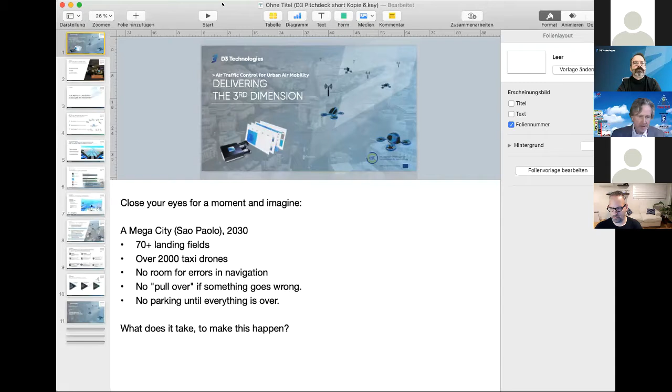Hello Willy, thanks for letting me be here. Can you hear me? Yes, I was muted already. Yes, hear you perfect, fine. Is it okay to share a screen? Yes, that's what we expect. Can you see full screen now, Willy? Yes, perfect, excellent, affirmative, thank you very much.

Hello to everyone listening. I'm very pleased to present our startup company. We've been around for about 9 to 12 months now, a little more with preparation time. So we're a newcomer to the field, but you will find out in a few moments that we believe we can bring a lot to this grand new venture of aviating urban skies.

Close your eyes for a moment and imagine a mega city in 2030: 70 plus landing fields, over 2,000 taxi drones in the air, no room for errors in navigation, no pulling over if something goes wrong, no parking until everything is over. What does it take to make this kind of traffic happen?

Urban airspace is dense, complex, and totally unforgiving. The well-known human pilot controller interaction is not a scalable proposition. No comprehensive solution has been proposed to this point, although a lot of ideas are being circulated. Air traffic control needs to be rethought from the ground up.

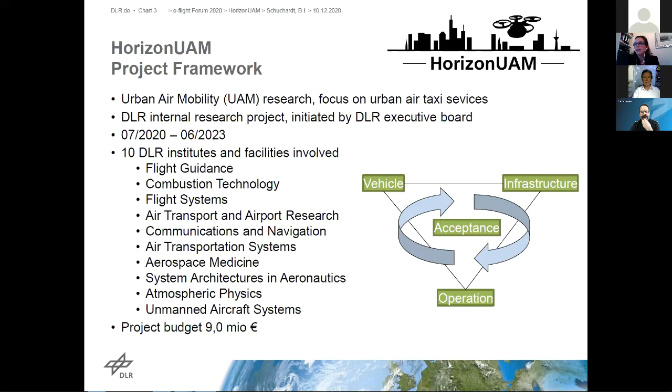Okay, this is the outline of the project content. I already said we are looking into vehicles - we won't actually build a vehicle, so we will keep it to theoretical layout of vehicle family concepts, looking into system technology and cabin design.

We will have the vertidromes - the infrastructure, flight guidance, network management and airport integration. As I said, acceptance is important, and we will also have a UAM system simulation, which we already started. We will have an overall system where we integrate the ideas of the 10 institutes involved in this research and bring together our simulation models to forecast demand, the economic effects, and to see how the UAM system can be operable.

Very important is the aspect of safety and security, especially autonomy. In the first designs and first vehicles we will probably still have pilots, but if we want a high number of operations and a future mobility system, we are envisioning a high level of autonomy, up to full autonomy without any pilot involved. So it's important to research this autonomy topic and how autonomy can be a certifiable process to be safely integrated. The last point is demonstration and assessment.

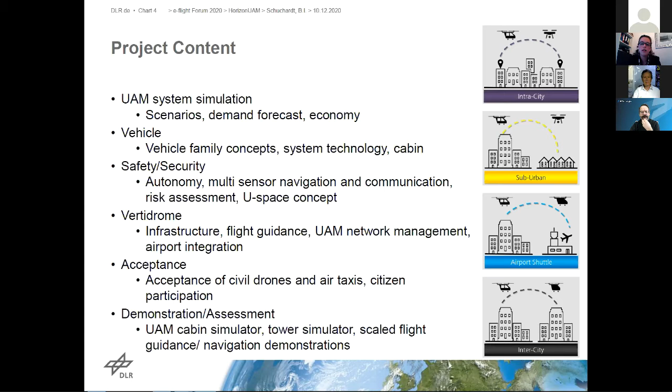We're happy that DLR recently bought a small regional airport in Germany, and we are planning to convert this into a test site for drones and urban air mobility vehicles in the next years. We will also have scaled flight tests here, not with real UAM prototypes yet, but with smaller drones to demonstrate our flight guidance and navigation concepts.

I've brought two more slides with topics I want to briefly focus on. First is the UAM aerodrome, the vertidrome, which we are looking into in detail in our research. I cannot present all of it, but take this as an example of what we are doing.

With the vertidrome, the difficult thing is that we don't really know yet what a vertiport or vertidrome will look like. We know conventional aerodromes, but not yet what a vertidrome needs to look like for high density operations in the inner city area.

So the first thing is that we need to forecast the demand. How many vehicles will be flying? Where will they be flying? Where are the best locations for our UAM aerodromes? Where do we have to place them in the city or around the city?

Then it's important to know what kind of vehicles will be landing there. Is it all vertical takeoff and landing, or do they need some short runway? This will have a big influence on how to design the vertidrome.

When we look at the operation itself, here comes in the flight guidance part of our research: what is the layout of the perfect vertidrome, scheduling, sequencing, how to manage the approach and departure paths, the trajectory planning. This is something we will look into.

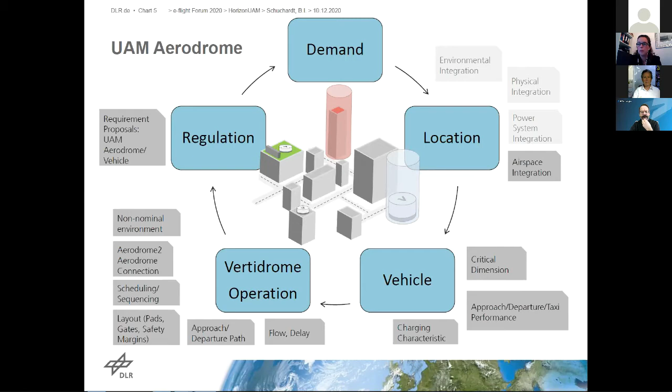And then in the end, we have to come up with new regulations. We have European regulations for helicopter operations, for example, but we do not have ready regulations for UAM operations. This is in the process of being developed, and we hope our research can bring ideas into this regulation initiative. If you can go to the next slide, please.

That's the second part. The session is called UTM, which is the term more common in the US. In Europe, the term U-Space has been created - that's the vision of the European Union to have a set of services designed to support safe, efficient, and secure access to airspace for large numbers of drones.

The initial idea was to have drones, but if we have a highly autonomous, up to fully autonomous, urban air mobility vehicle, we can see it as a drone. This U-Space concept and its services are supposed to provide the enabling framework to support routine UAM operations as well as drone operations, and to provide interfaces to manned aviation.

What's important to say is, although it's called U-Space, we do not see it as a defined volume of airspace. In the beginning we will need some segregated airspace for the first trials, but the goal in the end is to have no limited airspace for certain types of users - a fully integrated airspace for all kinds of users.

The U-Space concept foresees developing the services we need in four steps. We are currently at the first step, U1, with foundational services that are easy to start with, like e-registration of drones, e-identification of drones, and geofencing. That is the starting point.

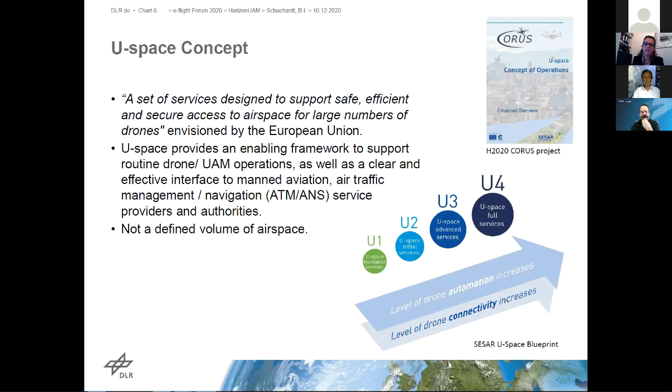Sorry. Yeah, there it is. Yeah, that's what I wanted, exactly.

Let me quickly tell you about the project phases. I said it was a 3-year project, so we are now in year 1, still working on the theoretical basis and gathering knowledge together. Year 2 will be more into implementation, getting our simulators ready and preparing demonstrations, and then phase 3, up to the year 2023, we will have our drone demonstrations and simulators ready for the final assessment.

I wanted to let you know that we are planning yearly symposia for scientific exchange beyond the project boundaries. The first symposium was planned for September 2021. So if you're interested in seeing first results from our HorizonUAM project, feel free to contact me. I'll keep you updated on the form the symposium will take and how we will share our research results.

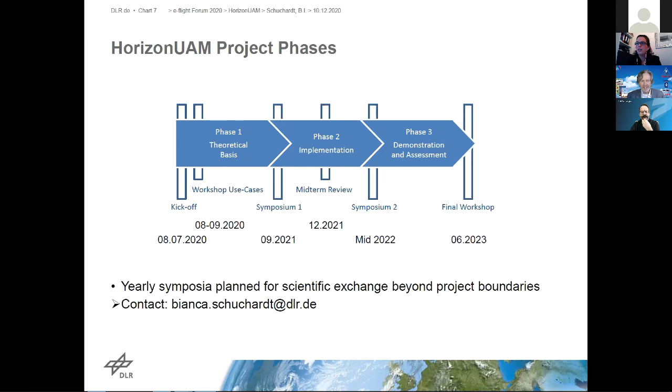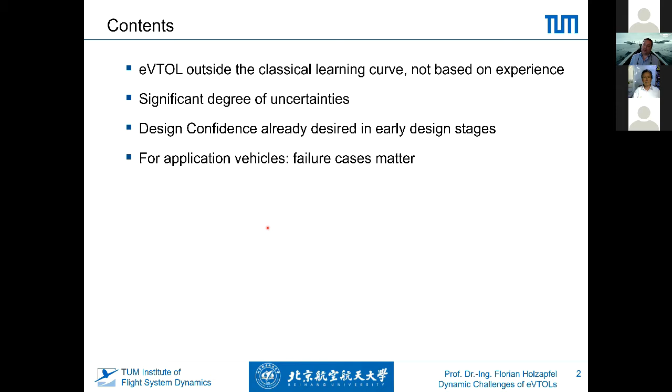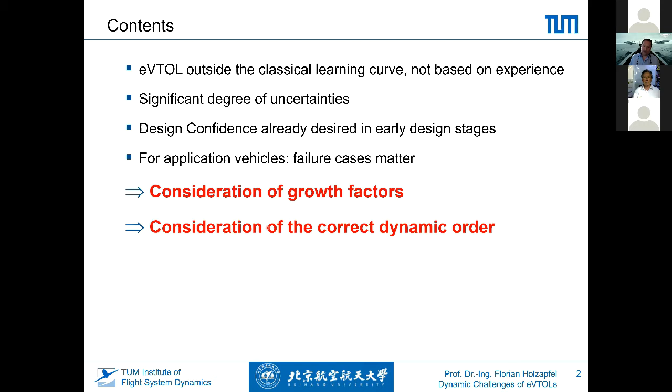The background is that eVTOLs are quite new, so there's not too much classical learning curve yet, not too much experience, but we still have a significant degree of uncertainties. Very much in the beginning, we already want to have a very high design confidence when we build a new vehicle. It's not only important to account for the nominal dynamics, but especially if you want to make a product vehicle, also for the different failure cases. We must carry over what we learned from small vehicles to big ones, but we need to take care of growth considerations. For large vehicles, we have to account for the correct dynamic order. We actively have to manage uncertainties in our models. We need to consider dirt effects that may make life hard, and as already addressed, we also need to consider failures.

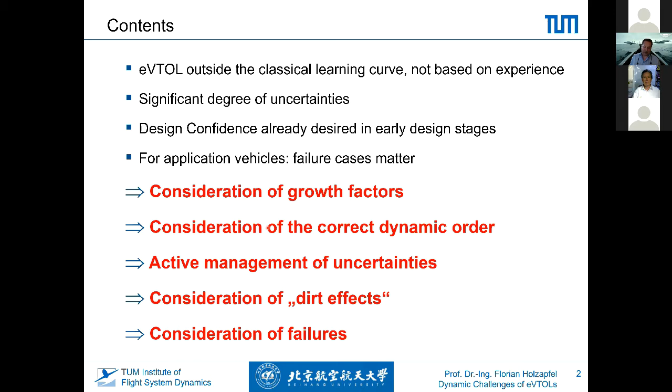This is a slide I already showed last year about the scaling factors. Many people build subscale models and then think you can directly carry over the experience gained to larger systems. What I'd like to highlight is that if you compare, for example, a 25 kilogram vehicle and a 600 kilogram vehicle, many properties, like the propeller inertias and so on, do not scale linearly at all, meaning important numbers get very nonlinear scalings. For example, if you want to make a sidestep maneuver of 5 meters in 5 seconds, for the 25 kilogram vehicle you only need 2% additional current, whereas for the 600 kilogram vehicle, the increase in current is 50%. So I'll try to speed up.

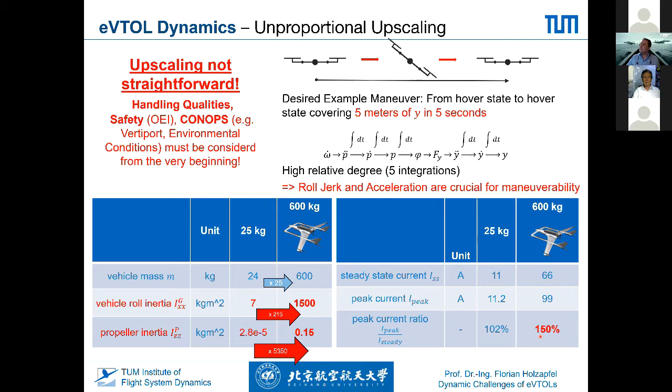This is a short summary: things don't scale linearly, be careful. The next thing is you have a lot of new effects which you don't know from classical airplanes.

For example, this time in hover, you have a lot of propeller airframe interactions.

Then what is very important in transition is the propeller aeroelasticity, because it leads to very large alternating moments from the structural loading, which are acting in the hub of the propeller.

Then depending on the configuration, and I'm happy that I saw some faces today from other companies from which I knew that they're also addressing these effects.

As soon as you have overlaps in the propeller areas, for example, you immediately get significant thrust losses, which is something you have to consider right from the beginning.

Then here on the upper right side, there's transient effects, which if you look from their scale in the time are very relevant to be considered also when you look at the rigid body dynamics.

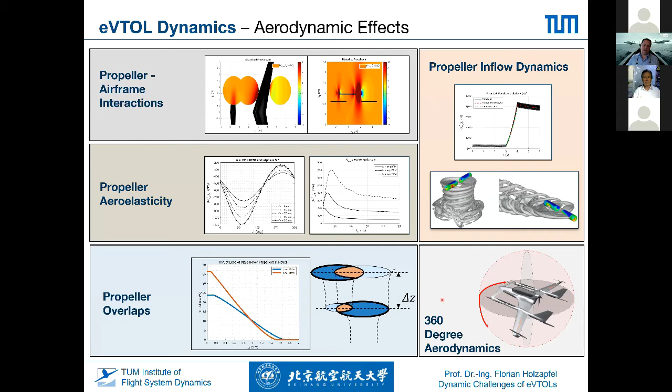And then finally, of course, in hover, you need 360-degree aerodynamics because you can have lateral gusts and things like that in hover. And so also for your fixed wing rigid body aircraft part, you need to account for aerodynamics which you normally would never calculate for normal fixed wing airplanes.

Then the next thing is that, of course, the structure is elastic, and now with the lift systems, especially under failure conditions where you have to redistribute, you have quite some excitation of structural responses, which lead to time lags in the rigid body response.

That also leads to aeroservoelastic effects. And this is why basically for the larger vehicles, these aeroservoelastic responses need to be considered right from the beginning.

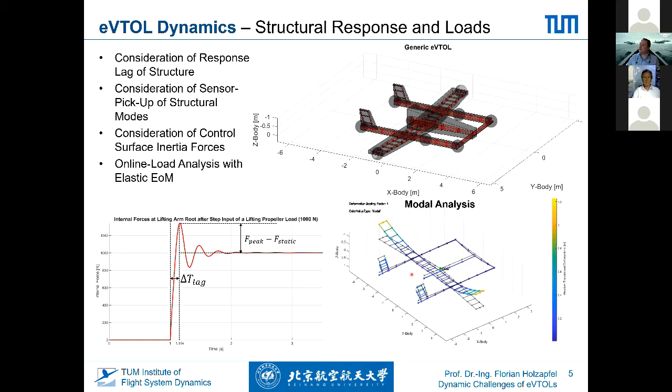So far, you saw things which are mainly based only on simulation. Here on the next slide, you would see measurements from the transition of a real 280 kilogram eVTOL. So that's the whole flight: hover, transition, fixed wing flight, retransition and landing.

And so you see you have a large contamination with vibrations. And so one of the important things is if you want to optimize your frequency domain response for the controller.

Is that you have appropriate methods to not only identify your vibration spectra, but also to produce models which in time domain simulations can make a very good replication of your vibration spectra so you can account for them during controller design.

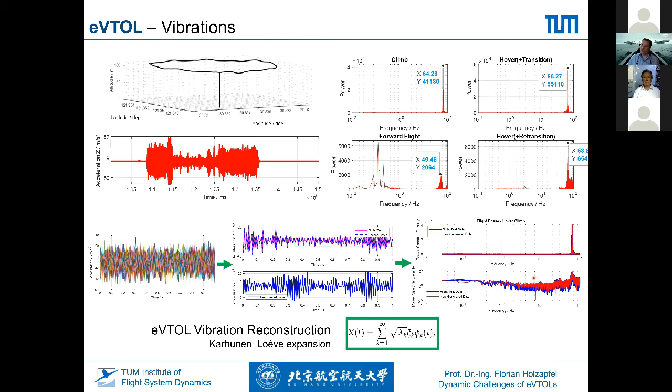Then the next thing which I introduced already in the beginning is that there's a very high level of uncertainties in the data because of the lack of experience, and therefore we moved away from having nominal models.

But for every model we make uncertainty modeling where we in the end use the stochastic characteristics of the uncertainties by specifying distributions and the values of these distributions, like normally distributed and so on.

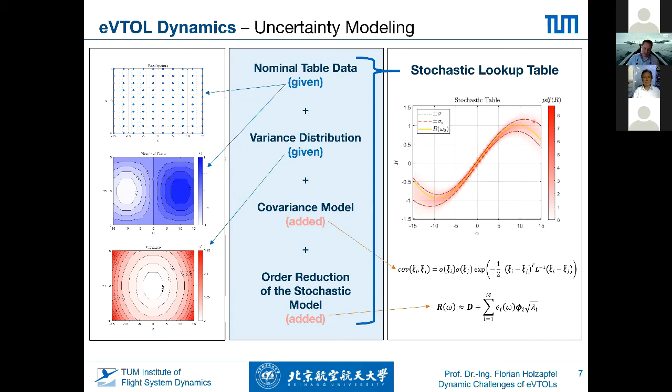And so one of our researchers implemented, in my opinion, a very cool new way in order to quantify these uncertainties in simulation models, which then can be used in analysis for making probabilistic predictions.

So for example, when you want to have the envelope which with a 99% or an 80% probability is trimmable and so on, you can now make all these flight mechanics and performance computations in a probabilistic manner.

Which helps you to set good design targets, for example, for maiden flight envelopes and so on. Then very important is what happens if you have failures.

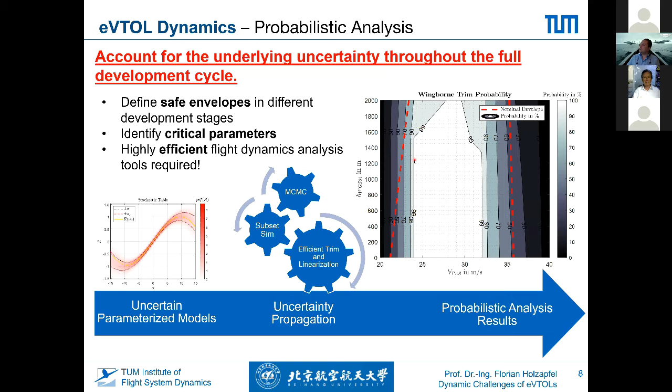Here I want to acknowledge our partner Beihang University, Professor Chang and Ming-Kai Wang, who are helping us very much in our very close cooperation.

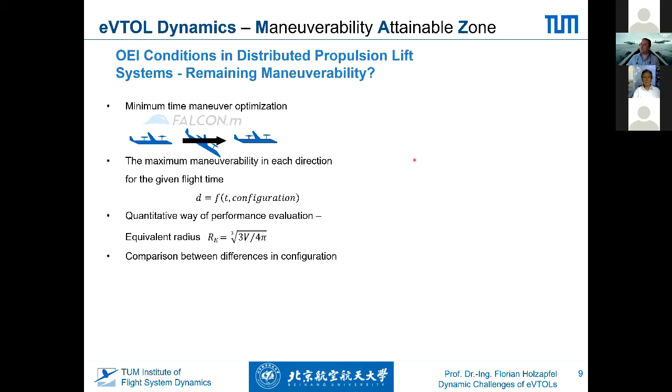And what you see here, again, I speed up, is basically the maneuverability envelope which you would have within 3 seconds. This is the red area if no engine fails. And so the volume you see inside is the guaranteed remaining maneuvering envelope if any single engine of a certain eVTOL configuration would fail.

And so this is very important to know because especially the precision in hover, which you have in a failed condition, is very important.

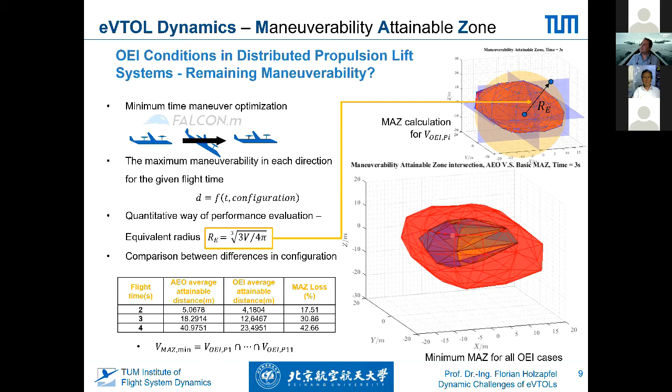And just like this, we also look at the handling qualities, where for the hover case, for the time being, we take a classic rotorcraft handling qualities approach and we look which handling qualities requirements are still satisfied if we have, for example, one engine inoperative.

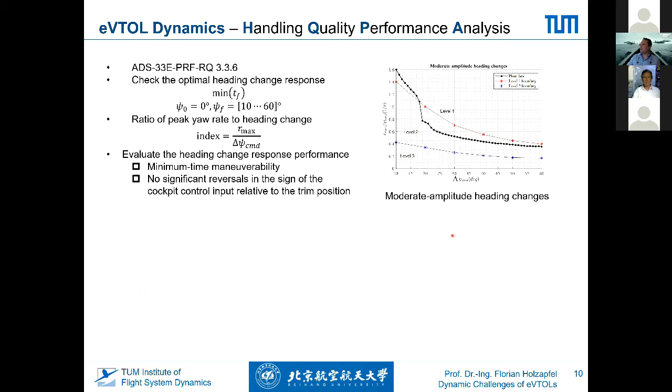And so here, for example, you can see the hover heading precision handling quality requirement, or the same thing, for example, for the altitude response.

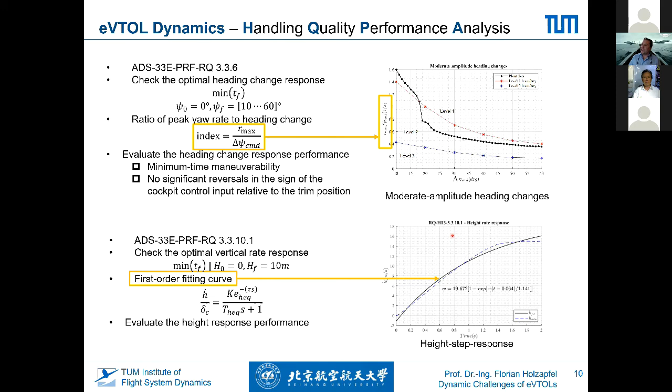And once again, it's not about the nominal behavior, but it's especially about the behavior in failure cases. And to do piloted evaluations for these handling qualities, we mainly use mission task elements.

And we are very happy to see that in ASTM F44.50, the task group WK68767, which is considering simplified vehicle operation, and also NASA and FAA, by the way, are also focusing on mission task elements as a very suitable way of doing the evaluation.

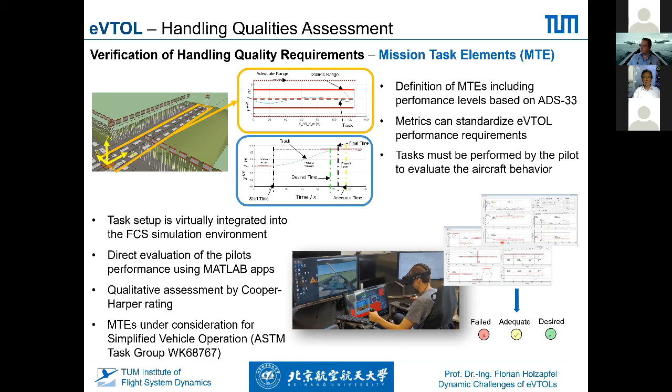Most of the time we use a virtual reality setup, so the pilot can look around and move the head, and basically we do a quite automated evaluation for this. And then finally, if you do flight tests, you want to do parameter estimation to update your simulation models from flight test. And this is what we're doing.

I think one of the new things we have there is that basically the identification routine is directly coupled with a blade element theory, a bottom-up physical model of the airplane. On the top right side, you see the identification results of one of my researchers for a Flettner rotor helicopter.

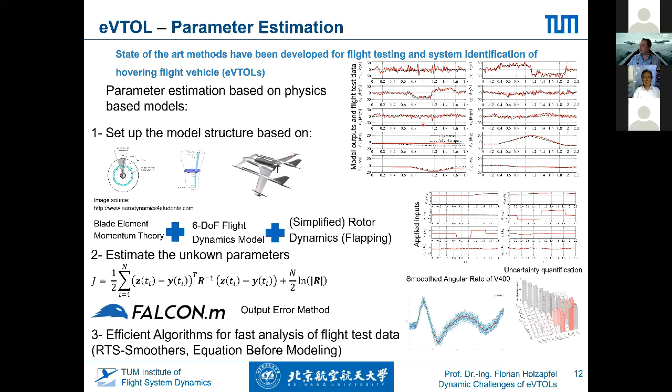And just to highlight that this is also working very well in the eVTOL domain, you can see here from a flight test for a 400 kilogram transition vehicle, from a real flight test just last week, basically the raw measurements, which would be the blue dots, and the data you get with a smoother, which is really based on a model of the system. This would allow you to get a very smooth reconstruction of the angular accelerations, which is then the input step to identifying the physical parameters of the system.

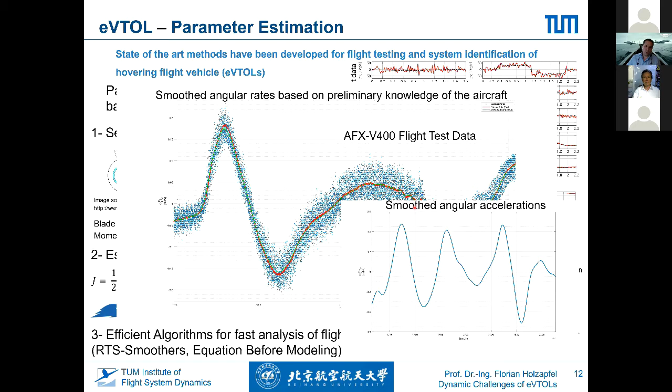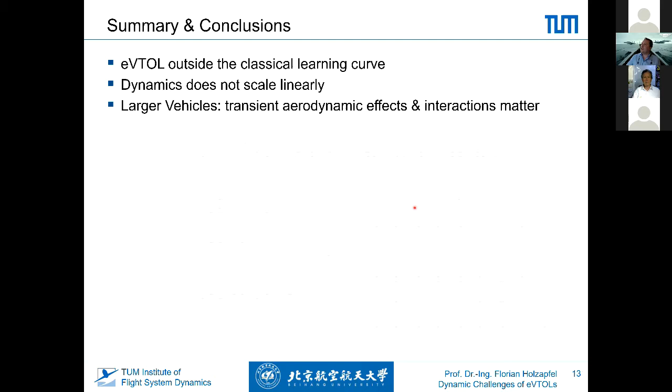So to sum up, eVTOLs are outside the classical learning curve. The dynamics does not scale linearly with size, so you have to be aware of size factors. In larger vehicles, transient aerodynamics and interaction effects matter more than in small ones. The structural dynamics adds a lag and low damping to critical responses, this is why you have to account for it. And it also produces new load cases with the lift systems in hover, especially during failure cases.

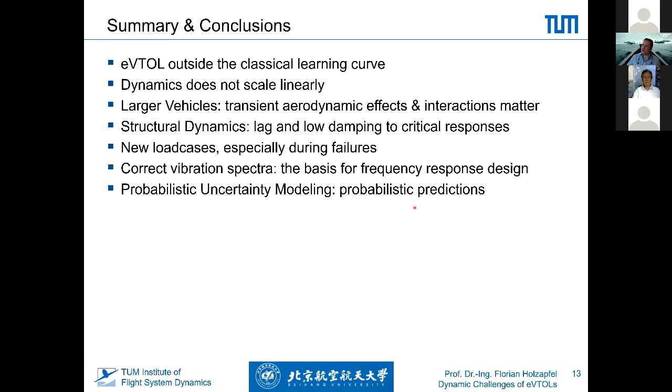You need to account for the vibration spectra of the real vehicle if you want to optimize the response of the closed loop system with the controller in the frequency domain. Then the probabilistic uncertainty modeling allows you to make probabilistic predictions with which probability a certain requirement will be fulfilled, to give you more safety in the background of the uncertainties.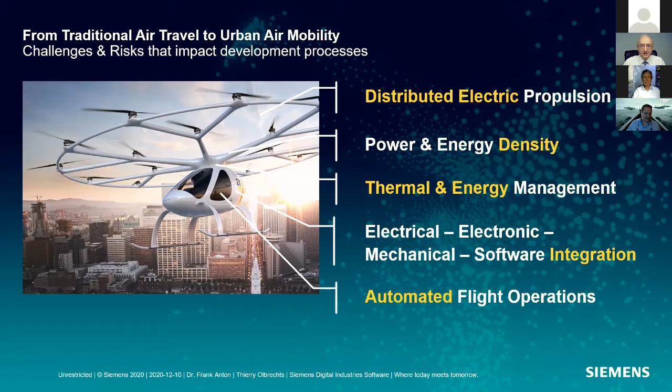But then it also comes to automated flight operation, which certainly, and I loved the word eVTOL that we learned about this morning. The automated flight operations, you will immediately ask for how can I early determine whether my sensors work, what do my sensors see, and can I simulate that, and can I understand how the system will be at the very beginning. But then it's also about the business model.

How do you deliver the whole logistics? When is which aircraft where, and where is it going to be charged, and how does the network work, and all these questions within the, let me call it, passenger experience. Also, this is something that with simulation, with the digital twin of the whole enterprise, you can very early design.

And then, you know, and you believe you are ready, you are close to ready, then it's of course about verification and certification. And there is this famous factor of pi. A project in aviation always takes a factor of pi more money and time than you anticipated. And if it is not an order of magnitude, but only a factor of pi, then you may be considered to be good. And verification and certification, if you have it in the process from the beginning in your design, in your digital twin, in your digital design, then you have a good chance of finalizing the project successfully.

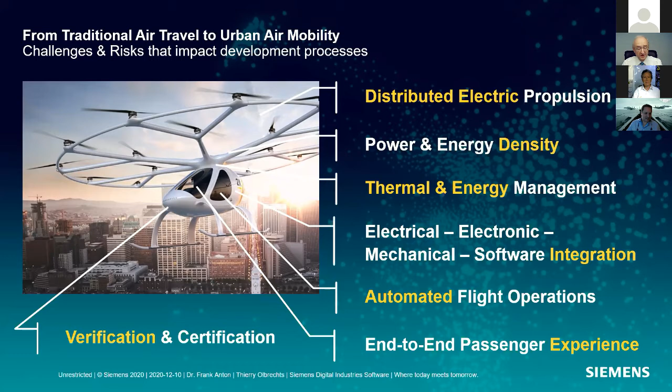And yeah, now I'm going to show you all the inside views and all the mysteries and simulations of these components. Oops, I forgot. I sold the business Siemens e-aircraft to Rolls-Royce a year ago. So obviously we also sold all the IP to Rolls-Royce. So unfortunately I can not.

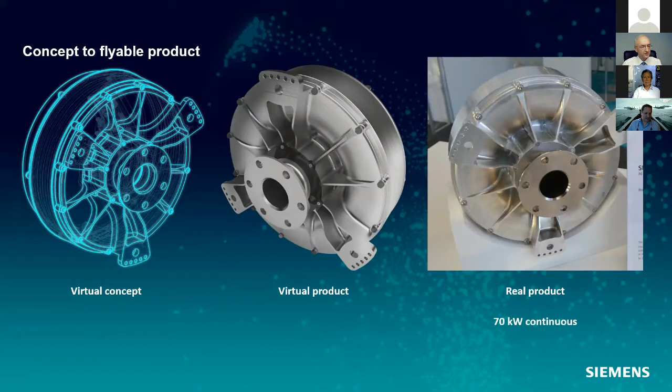So somehow I have to change the concept of my talk, and maybe I just speak about the experiences in application and tell you a little bit about the practical advantages that we had from simulation.

So again, to be such fast, we were using multi-physics simulations. Here are two examples. In the bottom line, you see the design of an electric machine, a motor, coming from electromagnetics, and the very important part of the thermal and cooling, but also the acoustics, leading to the integrated performance. And in the top line, it's the battery system coming from the cell design, the chemistry, the integration, the cooling, the control.

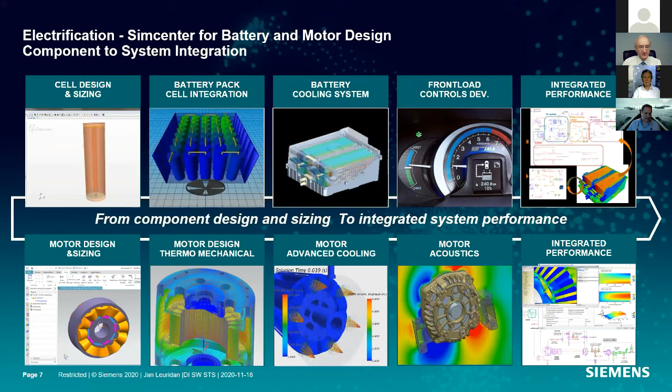And here you see a control system in the large area of automotive, where this software is widely applied. I, as a pilot, love the user interface of an aircraft much more than this one. And again, this leads to the integrated performance. Only with these multi-physics simulations, simulating everything at the same time, all the effects, were we able to really get fast to the early flights.

Just to take one other example, acoustics: there are so many factors which generate noise, and noise is probably the most important thing in electric vertical takeoff and landing. There's the structural noise, the noise coming from the fluid, but also from the fluid coupling with the structure. Then there is the turbulent flow, which by itself makes noise, but also makes noise by exciting vibration in the structure. And there is also noise generated by electromagnetic fluctuating forces in these electric machines. To simulate all these noise factors at the same time is of utmost importance when you look at the acoustics element of the flight.

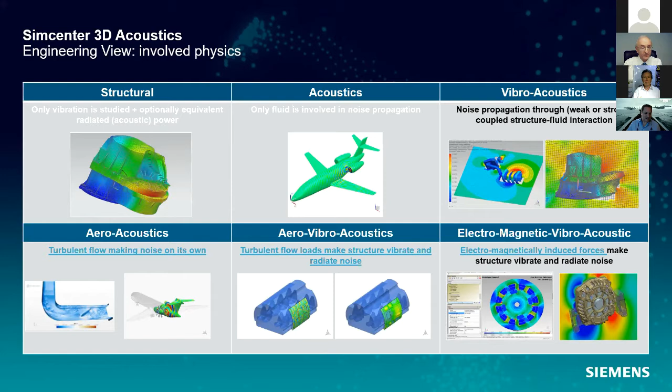So, a few examples of what we could only do by simulation. This is probably the smallest inverter that has ever driven an electric plane. It has a height of only 47 millimeters, much less than 2 inches, and with a weight of 0.9 kilogram and more than 100 kilovolt amps, it has 116 kilovolt amps per kilogram. Of course there were all these aspects of thermal, electromagnetic simulation. Only by simulating all this were we able to get very fast a permit to fly.

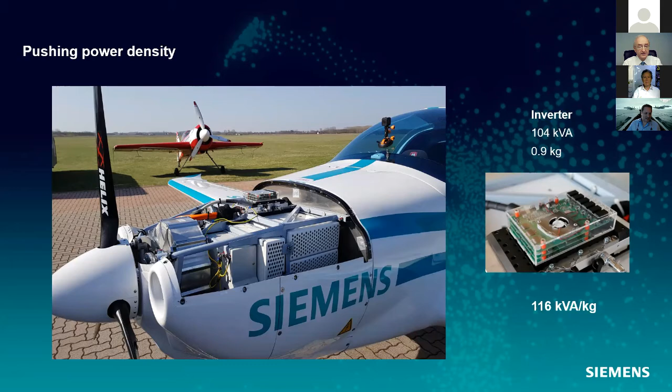On the left-hand side, you see that in one of the Magnuses we integrated this inverter, connecting it instead of the normal inverter, which is just one of the big boxes that you see here. And I actually flew one hour with this plane with this inverter. The only way to get there so quickly was by simulating with the digital twin beforehand.

Another game changer that was only possible by early simulation was, at that time, the strongest electric aircraft in the world with 260 kilowatts of continuous power. We integrated this into the Extra 330, which was called LE, for electrical, then. And it was very fast. With simulation, we were so fast that it only took us like 7 months. The handshake with Walter Extra I had in early December, and in July, just 7 months later, July 2016, Walter did the first flight of this strong electric plane.

A couple of months later, FAI world record time to climb, and 2 world records in speed, one for less than 1,000 kilogram, one for above 1,000 kilogram, which to my knowledge all 3 are still valid records. And also this plane, at Le Bourget, the main air show, every day towed the glider plane with Nicolas Honnons in the air at a level of 1,000 meters with approximately 10 meters per second climb rate. So at that time this was also the strongest electric towing plane, I think, up to now that I know of.

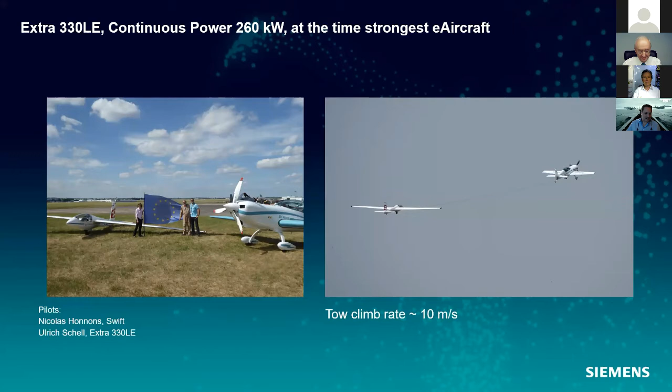And one other thing that Martin Freiling showed us yesterday, Diamond Aircraft, the world's first hybrid electric twin engine plane. This plane was to me a very important project because again, when we talk about electric, hybrid electric, we talk about distributed propulsion. If you are not using the benefit of distributed propulsion, scratch your head and ask yourself whether electric is really needed. Or in turn, if you go electric, use the capabilities that distributed electric propulsion gives you. So if this is the claim, then it was absolutely necessary to try a kind of distributed propulsion ourselves, and 2 is at least more than 1.

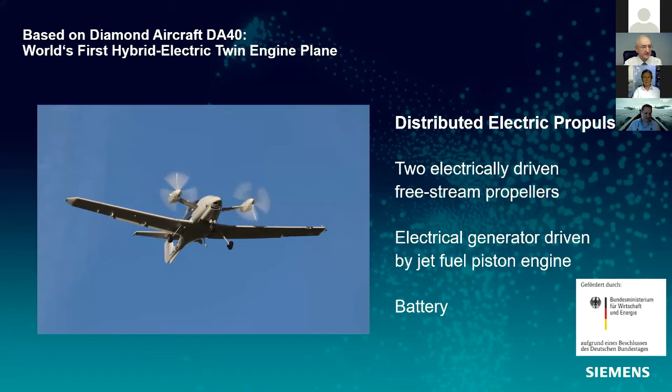So we built this plane with 2 very small electric motors and the big generator in the nose of the plane, as Martin explained very precisely yesterday. And if you look at the plane, you can see that these propellers are really very close to free stream propellers. So the integration efficiency of these 2 propulsors is much better than the one you have when there's a big engine in the nose of the airplane.

And you can imagine that to build such a plane and to get a permit to fly and to bring it in the air safely goes much better, if not to say is only possible, if you study all the effects in a multi-physics digital twin study before you really go to flight. So with these experiences from what we were involved in when e-aircraft was still Siemens, I can now turn to a picture that is very important.

And what is so important here is that the real world and the virtual world are coupled to each other. And this not only in the design phase, but also in the production phase and along the lifetime of the real product. And so to say, the virtual world has to be calibrated against the experience that you make in the real world with prototypes in the early design phase and with products during the lifetime of the product.

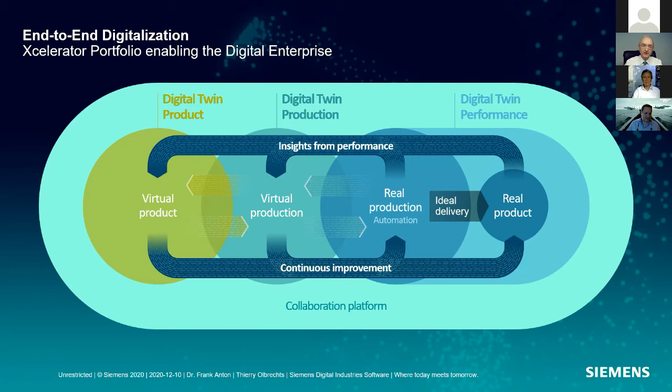And if you do all that, then with the Xcelerator portfolio that Siemens offers, this is really enabling the digital enterprise based on a collaboration platform of all these elements of the suite.

And to give you again an example that is close to our hearts, here you see on the top left, within the Sim Center portfolio, which is part of Xcelerator, an integrated system which consists of battery, electricity, electric control, inverter, motor, propeller of a quadrocopter, and also the flight dynamics model. And all of this is 1D, as we call it, in Amesim.

Then on the left bottom, you have a more detailed electric flow thermal submodel of the battery, which by the way is integrated in the top model on the top left. So if you click on the top left, you will find the details of the bottom left, more detailed model. And then when you switch to the mid bottom, you see a detailed CFD thermal model of this battery with all the air cooling, fluid cooling, etc. And all that CFD is integrated into the 1D on the left.

So that shows the scalability of the whole suite, of the whole digital twin. You start at a high level and you go into more detail, even down into the details of the CFD. And the detailed model then updates what you have in the system level and 1D calculation.

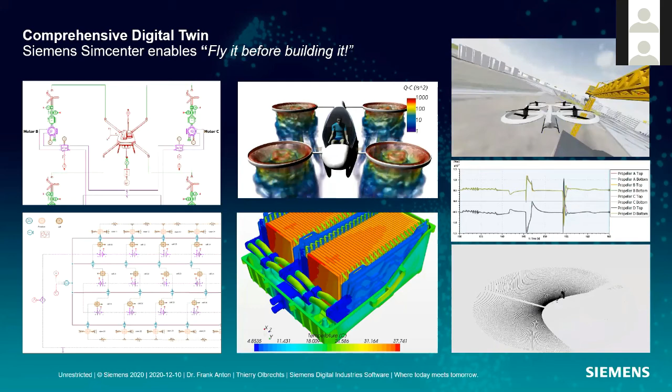And if now you are able to do additional tests in a digital twin, where you combine everything from the system and also the flight performance, the mission profile, then you can destroy as many inverters as you want during these trials, and you can get results which, if coupled to the real experience of prototypes, give the authority much better confidence about your results, so that they may give you the permit to fly even earlier.

So SimCenter that I have been talking about is the most comprehensive digital twin that I could think of, which goes from the structural performance through all the elements, multi-physics, but also cabin comfort, passenger safety, reliability, up to integration, verification, and certification.

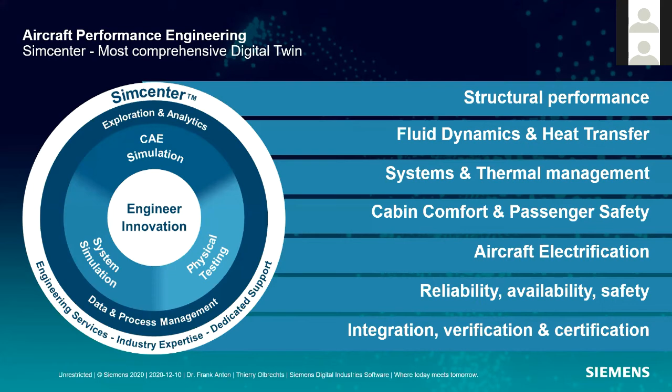SimCenter, if you will, is the engineering part of the whole suite. SimCenter talks Newton, it talks Bernoulli, SimCenter talks Maxwell. And Xcelerator, the whole software suite that we offer, has more to it. SimCenter is a part of it. Other parts are the digital thread, to name Teamcenter, to name Polarion, and others. So with this complete suite, you really get a comprehensive digital twin. You get a competitive advantage, and this is probably what we all want.

So if you have any questions about our flight experience or about SimCenter, then you can always address Thierry, who is always also in the call. Thierry Olbrechts is responsible for the SimCenter Aerospace Solutions, or you can address me, send me an email, frank.anton@eaircraftconsulting.com. And by the way, if you have any questions about the technology inside the propulsion systems, ask my very good friends at Rolls-Royce. Really, thank you.